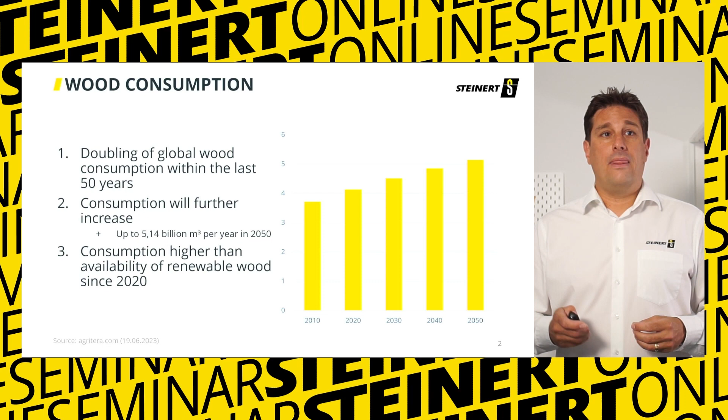If we see as well, the price of the fresh wood, or in general of wood, is increasing over the years. We had a peak in 2021, we know it. There, the wood price increased by almost 400%. Nevertheless, we need to find a solution for that. We need to find a solution to substitute fresh wood, and we need to find a solution to bring the price down, because it's always as well about economy.

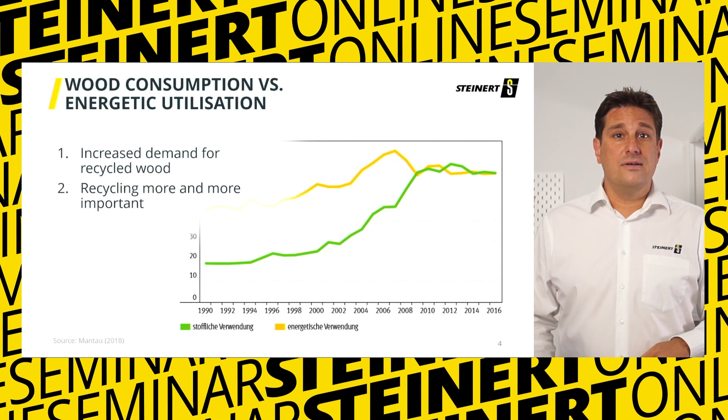Here we see the increased demand for recycled wood. In the past, wood was always there for energetic consumption. Now we use it as well to replace fresh wood for furniture, for all the products you see around your desk or wherever you are in the world at the moment. So here we have a global impact. I just want to give you a brief overview as well.

What does it mean if we use too much fresh wood? Only in Germany, 20% of the CO2 is bound in the trees that we have around here. And if we tear them down, we will create an environmental problem. So therefore, and due to the fact that we don't have that much fresh wood anymore, we need to substitute this. We need to use recycled wood for the industry.

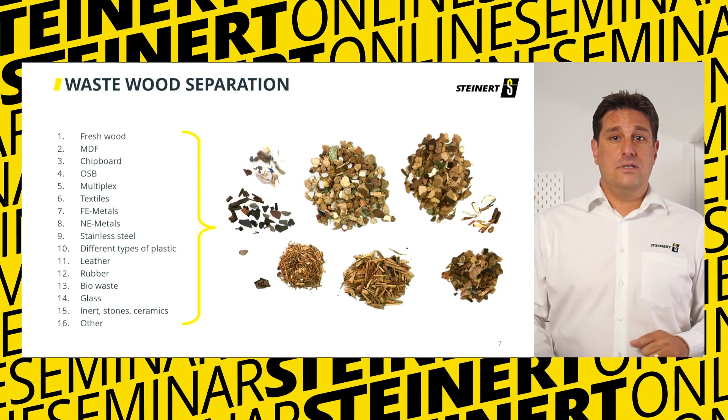And we as STEINERT, we figured out a concept. It's worthwhile to mention this is a general concept. It's not the only concept. Together with our experts, together with me, together with the people in the test center, we can adjust such a concept and the process due to your needs. So this is important. But here we have a general concept, and I want to show you the units we use to separate the material.

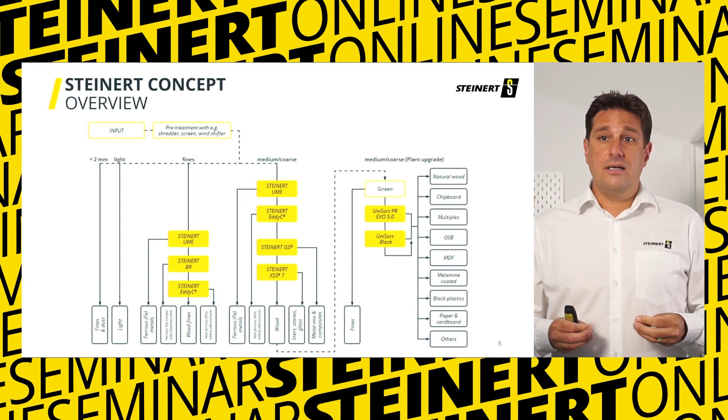If you look at this flowchart, it's very important to mention that preparation of material is very important. If you don't prepare your material in the right way, nobody can sort it in the proper way. That's important to know. The fines, the very light fines, needed to be screened out. Under 2 millimeter, we see here the lights or whatever, dust, fines, we can't process it, nobody can process it.

Then you create a fines fraction. The grain size range depends on the process and can be figured out in a special test or whatever. I would say it's always good to screen it at -20, but this is a rough figure for you. Maybe you can screen it at -40, maybe at -10, but here I would like to say -20 is a good number, and this fine fraction you can treat with different sorters. We will go through it later.

The medium coarse fraction is the important fraction for your A-wood quality. Afterwards, you treat it as well with different STEINERT sorters, different steps. In the end, we have our near-infrared sorters and other sensor sorters to create valuable A-wood products. Let's have a closer look on the different stages we just talked about.

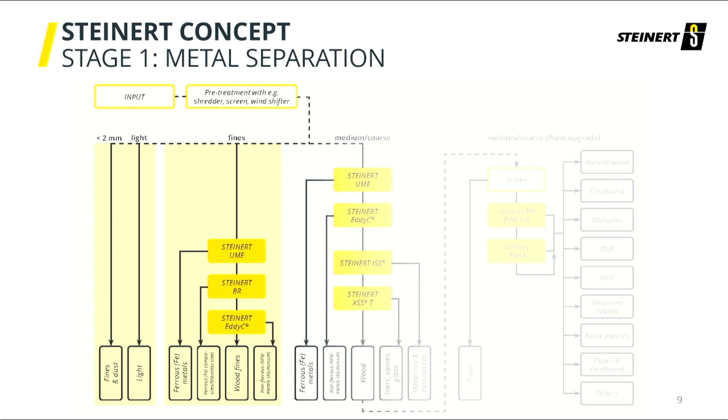So if you have the fines, we recommend a ferrous and non-ferrous separation, because you always have some nails, you have some non-ferrous material, some aluminium and so on, and this can be sorted out to have a fine metal-free product that you can bring back into your process probably later on, or that can go to incineration if you want. And these are examples of units we use to separate out the ferrous and the non-ferrous metals.

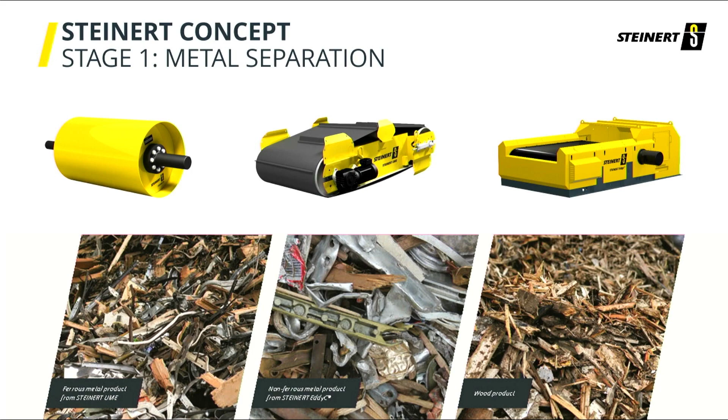And with this unit you can separate ferrous metals out of a stream up to big items. You see it on the bottom. There are some examples, some products that came out of this magnet. On the right side, our very well-known eddy current. We have the eccentric pole system, adjustable, and with this unit you can take out all the non-ferrous metals, mainly aluminium, but as well copper, zinc, brass, whatever.

You can separate it out of the wood product, and now you have a pre-treated product. Or if you talk about fines, you have a fine fraction of wood that you can reuse, that you can burn or whatever. And if you talk about the coarse fraction that we will see later on, you prepare the material with these sorters to do the next step.

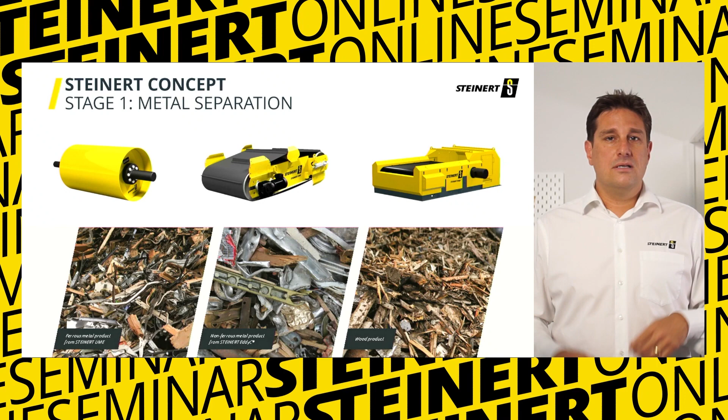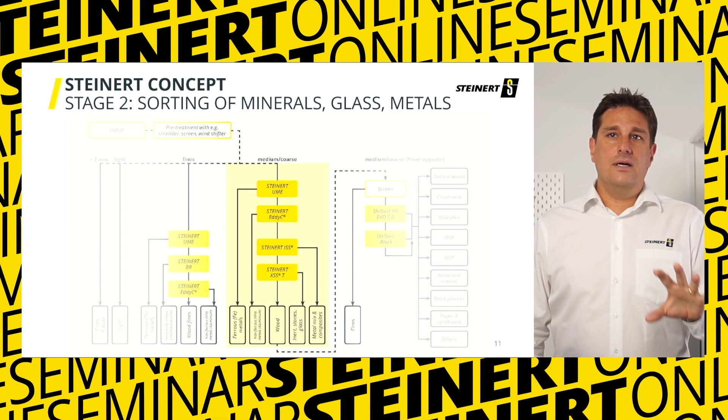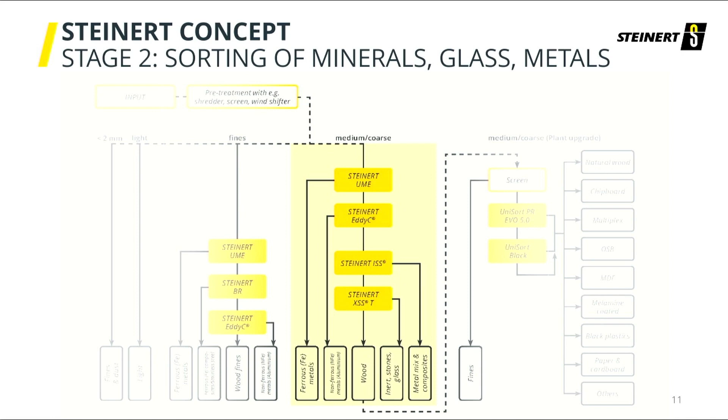Here, to remind everybody, this is the medium and coarse fraction separation, the pre-treatment, and afterwards the upgrade. Let's have a closer look as well. We discussed already the UME and the eddy, so that means we prepared with physical separation, ferrous and non-ferrous separation. And then we use sensor sorters. You always maybe have some lost metals there. You can have some stainless steel there. You can have copper wires there, very thin material, and the eddy current probably will miss some.

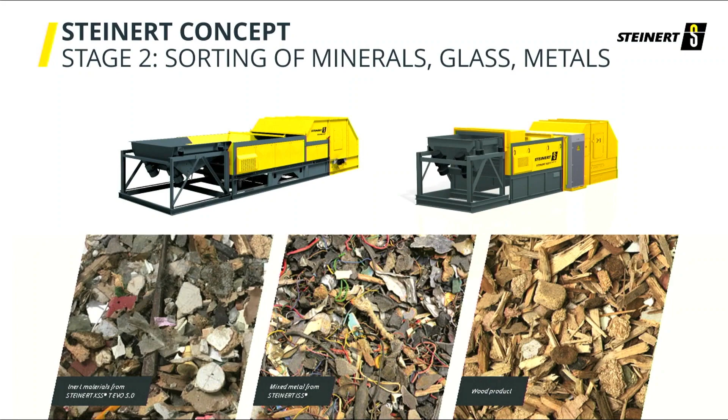The ISS, as mentioned, with an induction sorter to take out all the lost metals, stainless steel metals that you can't separate with an eddy or with a magnet. On the right side, on the top, you see our XSS, an X-ray transmission. We have different types of XSS sensors, but for this application we use the transmission. It's a very well-proved X-ray source, and this X-ray source works with a dual energy X-ray source, and it separates or it detects by density.

And if you ask me now, why should I use an X-ray? We still could have some metals, or you could replace as well the ISS. It's doing the same job as an ISS plus some advantages. You have inerts, you have stones, you have rubber, maybe you have PVC plastics there, and you want to separate them out. And in this case, you can use an ISS and an XSS on top to have everything out of this product. And then we have a prepared wood product, metal free, free of inerts, free of stones, free of all the things that you want to have out, and you can use it or reprocess it in an upgrade.

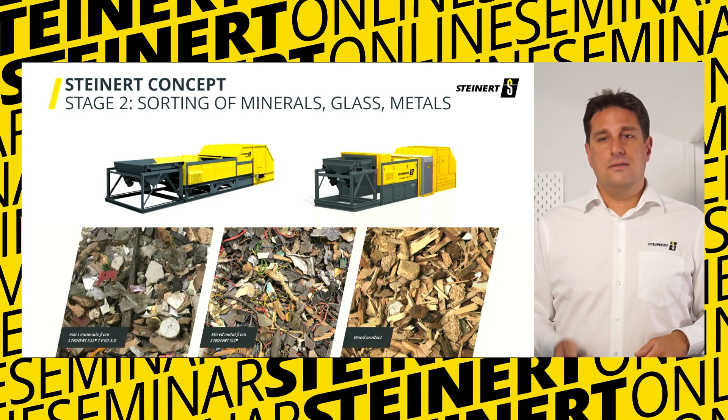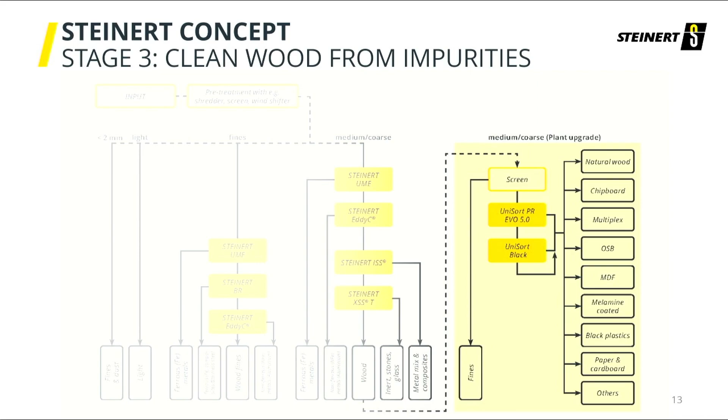And now we talk about this upgrade section. After the upgrade or after the pre-sorting, you see there a screen, and I want to go back to the things I said at the beginning. Preparation of material is very important. In such a flow, in a wood recycling process, you create fines. You can't avoid it. Material is dropping down, material is transported by conveyors, by feeders, and so on. You shoot with air, and some of the chipboard or whatever will break.

And if you don't take this out, you will not have these results you can achieve with a very well prepared material. So what we would recommend here is, before the upgrade, before the near infrared sorters, use another screen, take the fines out, and then process the material on our Unisort sorters to create a valuable product.

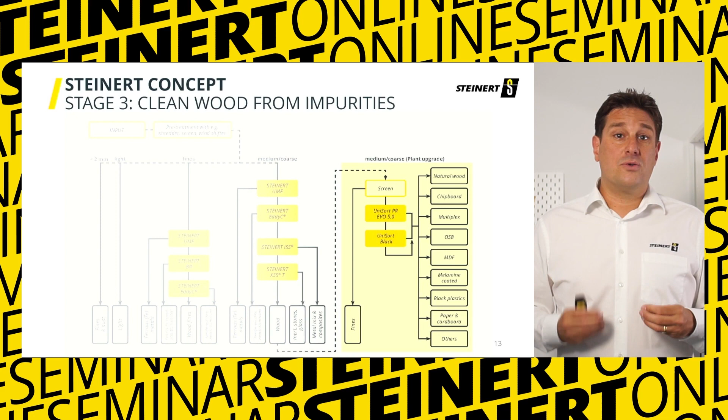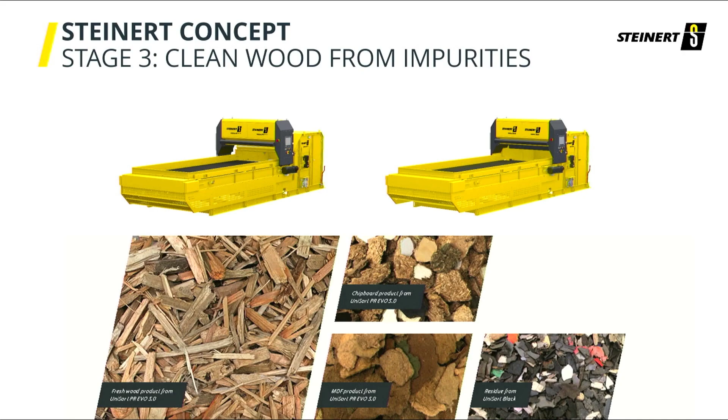Let me shortly give you an overview about the differences. The standard Unisort uses a near-infrared camera system to detect the material. The black one as well, looking in another area, and we maybe all know that a near-infrared sorter is blind for black objects. This Unisort Black can detect black objects. Can't tell you if it's a black stone, a black rubber, a black PP, PE, but a black object. You want to have them out of your wood material, so that's why you could use a black in this case as well.

Here, some overviews or some topics about our near-infrared sorter. It's very important to mention we use a HSI technology. So this is a hyperspectral imaging technology, a near-infrared camera. It's not a spectrometer, and we collect a lot of data, and we analyze this data very intensively. On 1 meter belt, our sorting bridge, everything included, computer, light bars, near-infrared camera, cooling system, everything is inside. And on 1 meter, this near-infrared sorter measures 320 points on the belt in a line scan. So we have almost no blind spots on the belt, we see everything.

And there's a signal coming back. This is this near-infrared signal, and the computer analyzes this near-infrared signal. You see on the left side, on the bottom, a near-infrared resolution curve. And we as STEINERT, we put 256 measurement points on the near-infrared resolution curve. So therefore, we really can distinguish not only between plastics and wood, paper, cardboard, but as well between different types of wood. A-wood, chipboard, melamine, what's a coated material in the end, honestly. Chipboard I mentioned already, plywood, all these things. We really see a difference in the near-infrared spectrum, and if you see a difference, you can separate it.

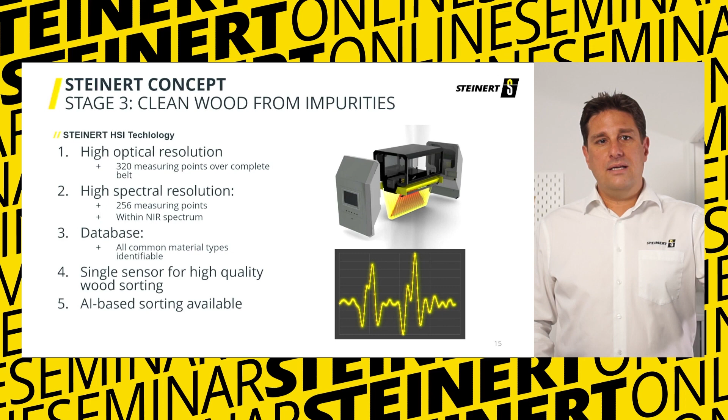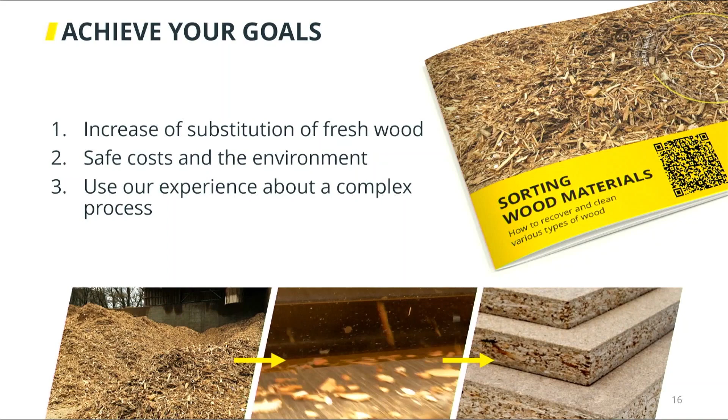Now to summarize everything. I know we don't have that much time, so this is a short presentation. Please remember, if you have more questions or want to go deep into detail, we have our area sales managers around, and I'm here as well. If you have questions, don't hesitate to contact us afterwards. We'll help you and answer all your questions, even the ones we can't answer now during this presentation.

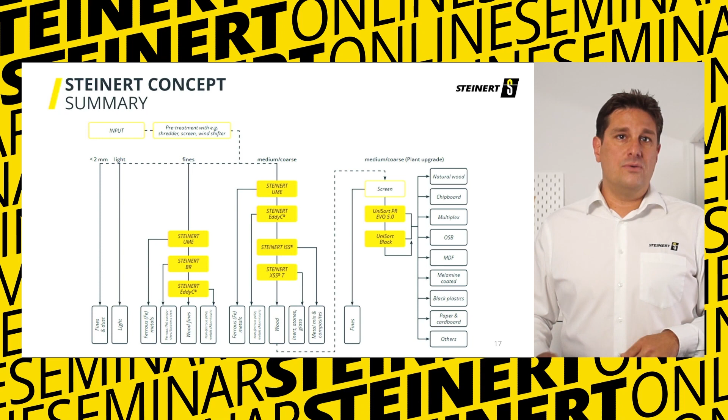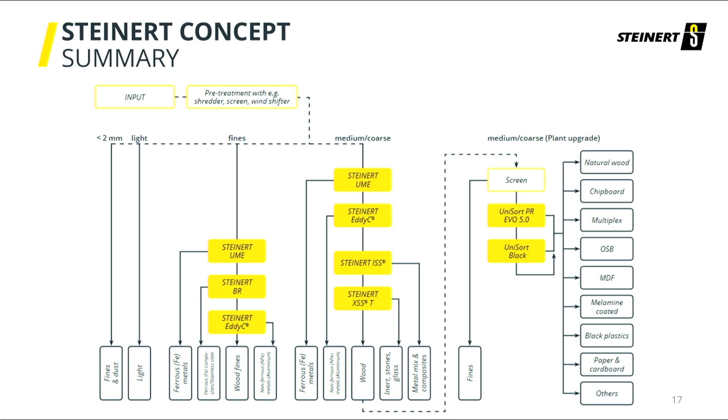Here you see the overview again. Important to mention: take out the very fines, take the fine fraction for ferrous and non-ferrous separation, and the medium coarse fraction, maybe 20 plus or whatever. You treat it, separate out ferrous, non-ferrous, separate out inerts, stones, glass, maybe rubber, all the plastics. Then after you sort out all the impurities, you sort it into valuable fractions - A, natural wood, chipboard, multiplex, OSB, MDF, whatever you want to do.

We can equip our eddy current sorter, for example, with a color camera, so that can be important if you want to have painted wood out of your stream. Even A wood but painted, we could take it out if we see it. Remember that this is a surface scan for sure.

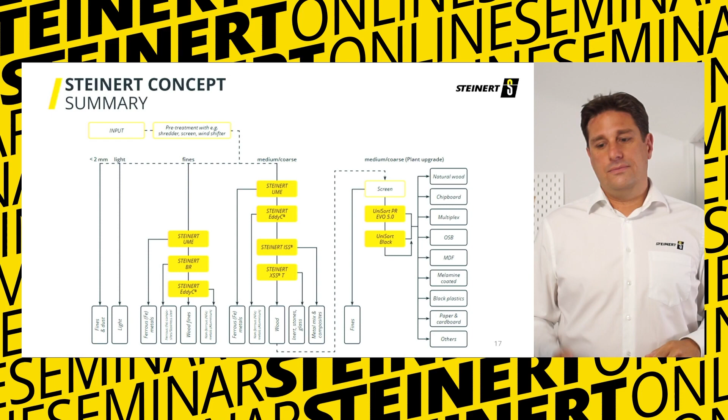Here is a showcase, a very successful story I wanted to mention, and I'm happy about it because it was a project we did roughly 3 years ago with the company Fantoni in Italy, close to Udine. We did the complete concept together with Marco Fantoni and his team. We are all very happy because this plant is running quite well. We have a complete, fully equipped STEINERT plant there. He's treating 50 tons of wood per hour, 250,000 tons a year of recycled wood.

We have ferrous separators, non-ferrous separators, our X-ray sorters, and the eddy current sorters there. A very successful story, and thank you to Mr. Fantoni as well from this side again, because it was very nice to do the project together. The plant is running now, producing a lot of good recycled wood for MDF and chipboard production. Mr. Fantoni is happy, we are happy. It was a great success story, and thank you very much from this side as well if you're listening.

Important to mention is how do we evaluate which units we use. As I mentioned before, we have this general concept that can be adjusted, but material is somehow different from every customer. So we have a huge test center now close to our head office here, 5 kilometers away - 3,000 square meters of test center with a fully equipped line for waste recycling.